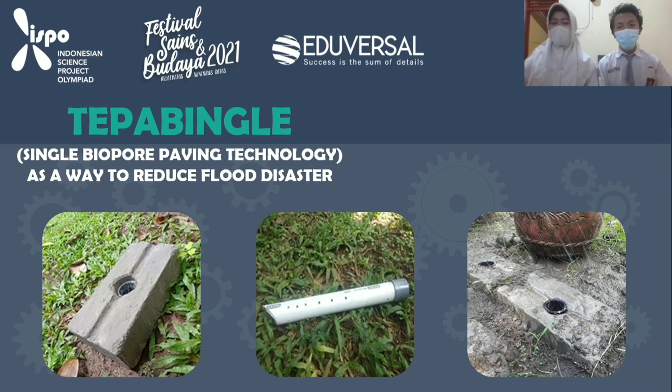We are here to show you our research called TEPABINGLE, single biopore paving technology as a way to reduce flood disaster.

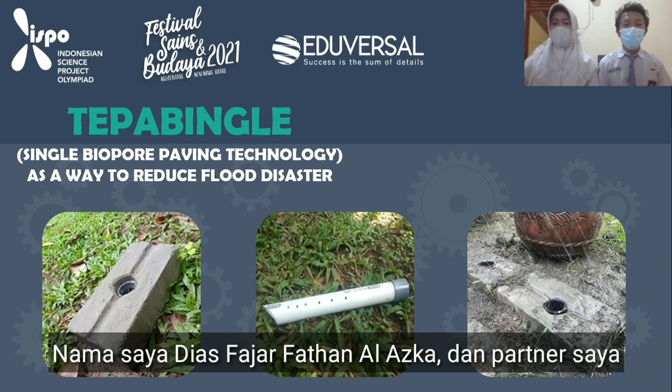Background: flood is a common disaster that occurs in Indonesia. BNPB, from an article published by katadata.co.id, notes that there have been

Problem formulation: first, the high number of floods in Indonesia; second, the lack of water catchment areas in many places; third, the incapability of conventional biopores in places that do not have water catchment areas.

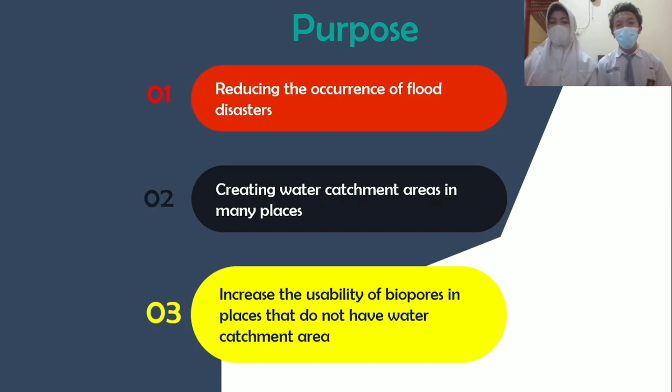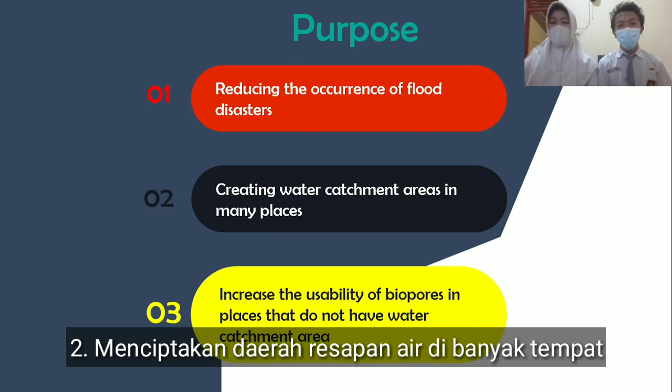So the purposes of this research are: number 1, reducing the occurrence of flood disasters; number 2, creating water catchment areas in many places; and number 3, increasing the usability of biopores in places that do not have a water catchment area.

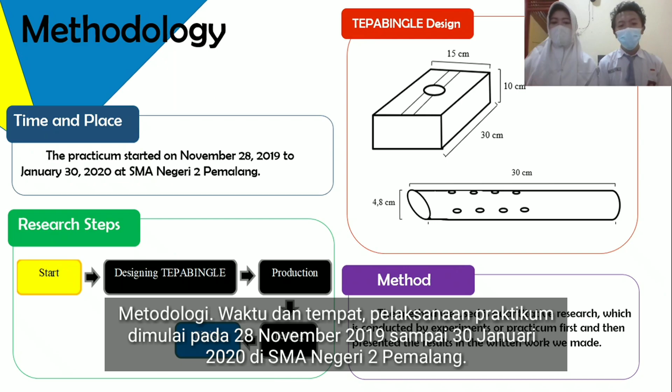Methodology, time and place: the practicum started on November 28, 2019 and ran to January 30, 2020 at SMA Negeri 2 Pemalang.

The steps are: first, start; then designing TEPABINGLE; production; testing; and finish.

So the design of TEPABINGLE has two main parts. The first part is the paving itself, which has 30 cm of length, 10 cm of height, and 15 cm of width.

The second main part is the pipe, which has 30 cm of length and 4.8 cm of diameter.

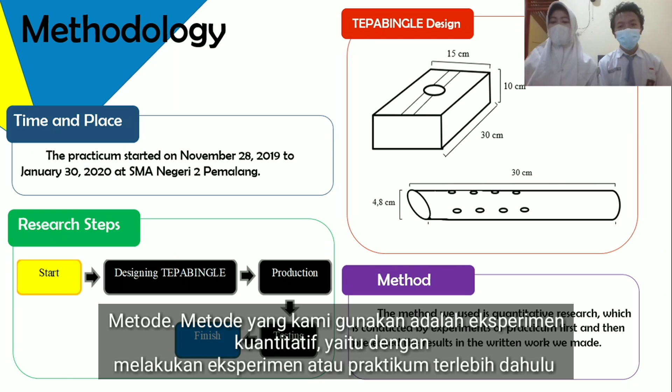Method: the method we use is quantitative research, conducted by experiment or practicum first, then presenting the result in the written work we made.

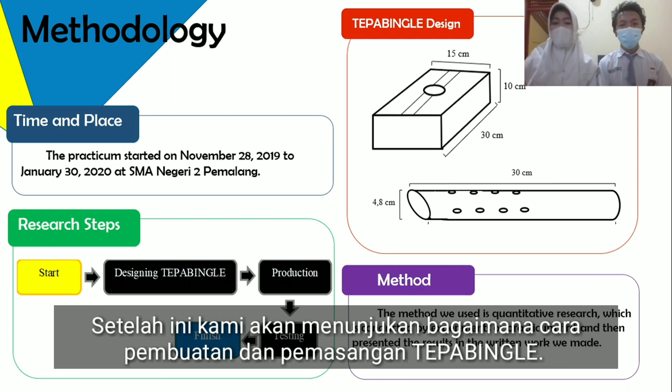After this, we will show you how to make and apply TEPABINGLE. Check out.

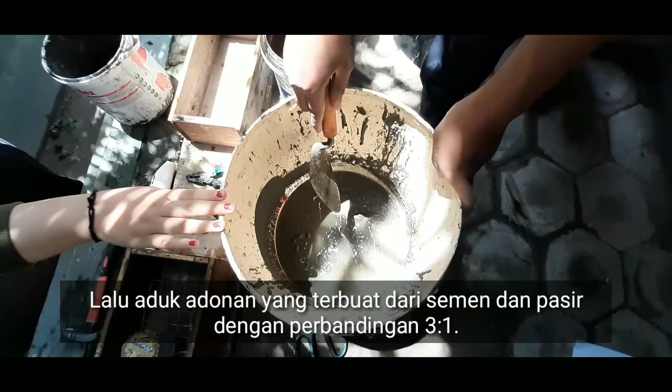First, there is a mold made from wood that has a rectangular shape. Then mix the dough made from cement and sand with a 3:1 composition. Then bend the wire mesh so it fits the mold.

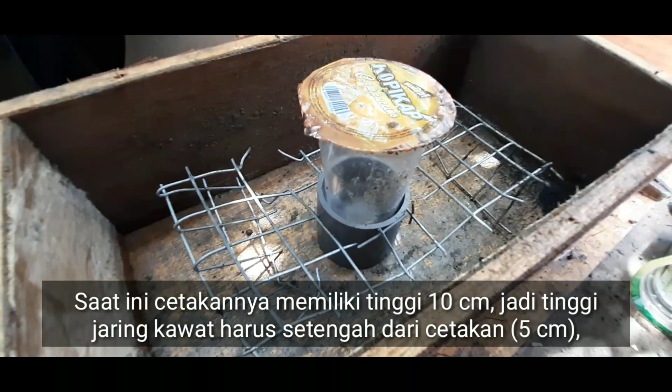In this case, the mold has 10 cm of height, so the wire mesh should be half of it, 5 cm. After that, put the socket into the wire mesh, then put the cup on top of it.

This will prevent the dough from entering the socket. Then pour the dough into the mold while pressing the cup so the socket and the mesh don't move. After this, we should wait until the dough is completely dry.

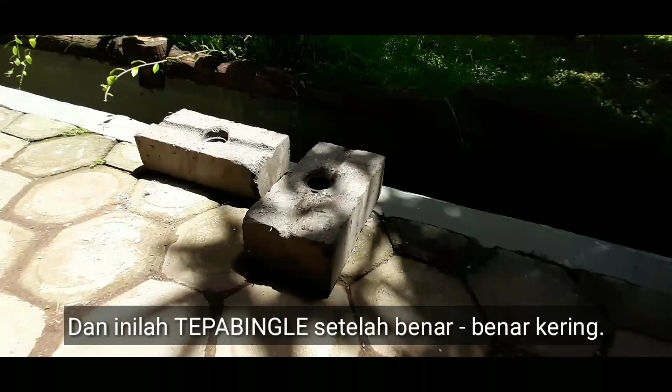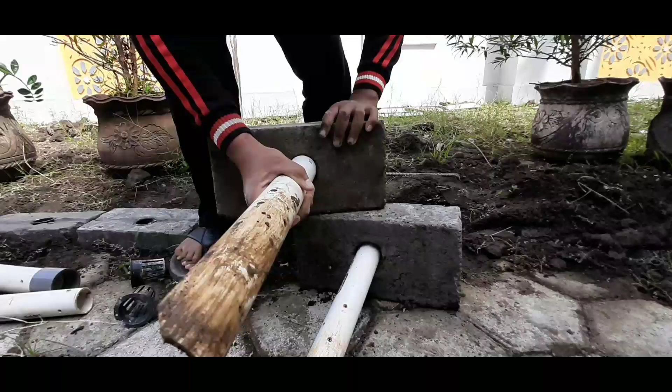This is the TEPABINGLE after it dried, and now we are about to apply it to the soil. This TEPABINGLE has a socket for a 4.8 cm diameter pipe. Then put the pipe into its socket.

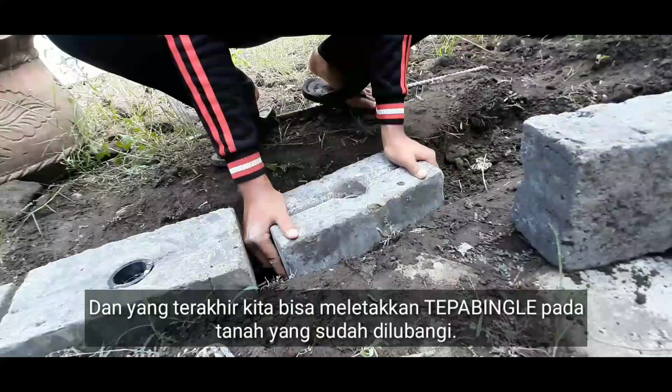And finally, we can put the TEPABINGLE in the hole that has been perforated. This TEPABINGLE has a filter to filter waste from incoming water. So this is the practical result.

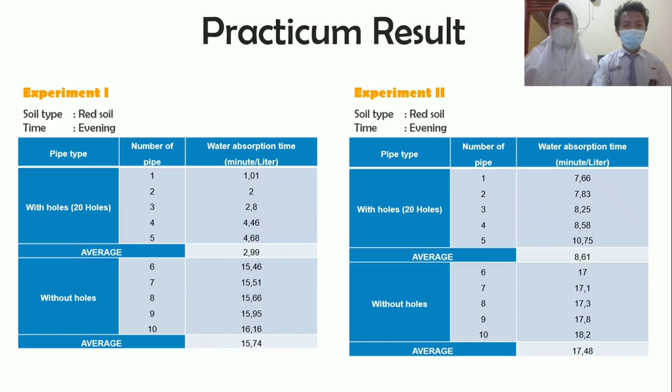Discussion: based on the research, it can be concluded that TEPABINGLE is very effective, especially on soils that can easily absorb water, such as red soil and humus soil, and will be less effective on clay soil and sandy soil because it is difficult to absorb water.

However, there are exceptions to sandy soils.

Even though sand has characteristics that make it difficult to absorb water, sandy soils have large pores that cause water to enter very quickly.

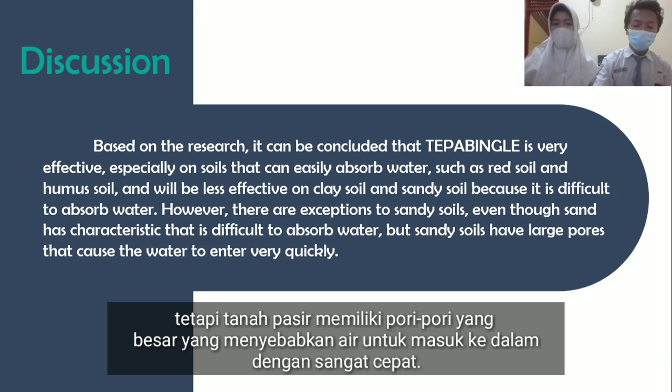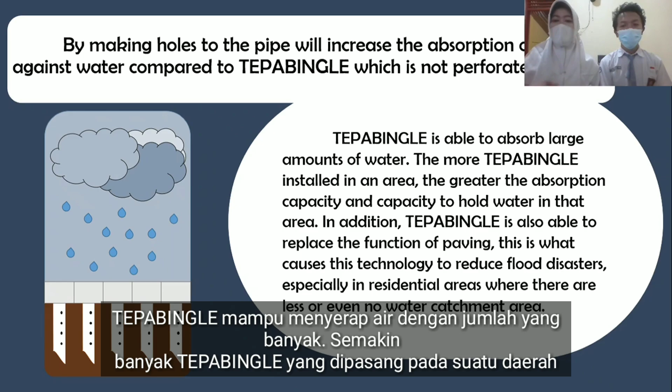By making holes in the pipe, the absorption of the soil against water increases compared to TEPABINGLE that is not perforated. TEPABINGLE is able to absorb a large amount of water. The more TEPABINGLE installed in an area, the greater the absorption capacity and capacity to hold water in that area.

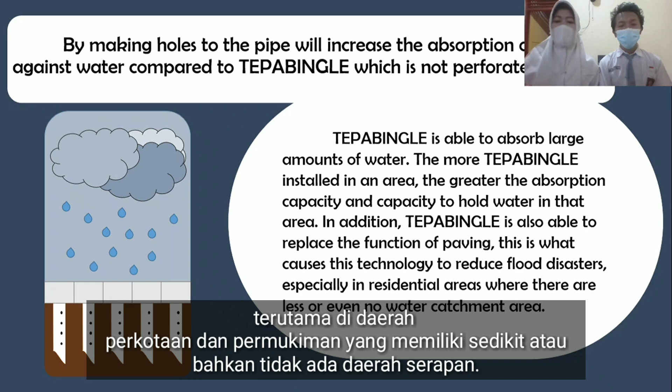In addition, TEPABINGLE is also able to replace the function of paving. This is what causes this technology to reduce flood disaster, especially in residential areas where there is less or even no water catchment area.

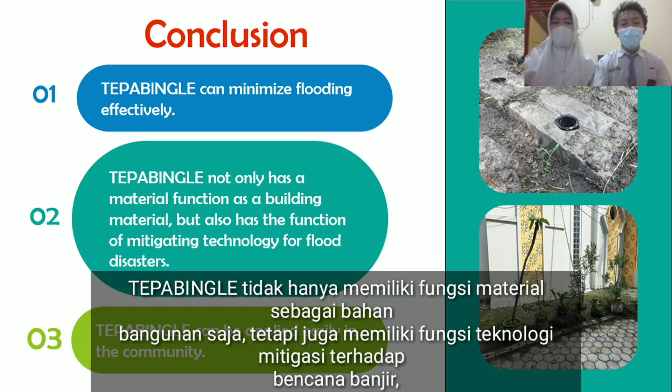So the conclusions are: TEPABINGLE can minimize flooding effectively; TEPABINGLE not only has a material function as a building material, but also has the function of mitigating technology for flood disasters; and TEPABINGLE can be applied easily in the community.

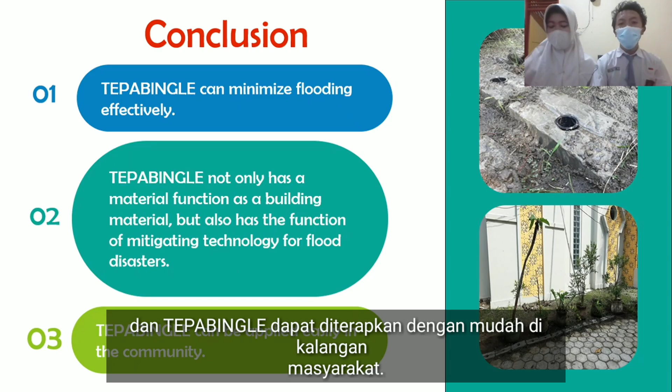This is the documentation.